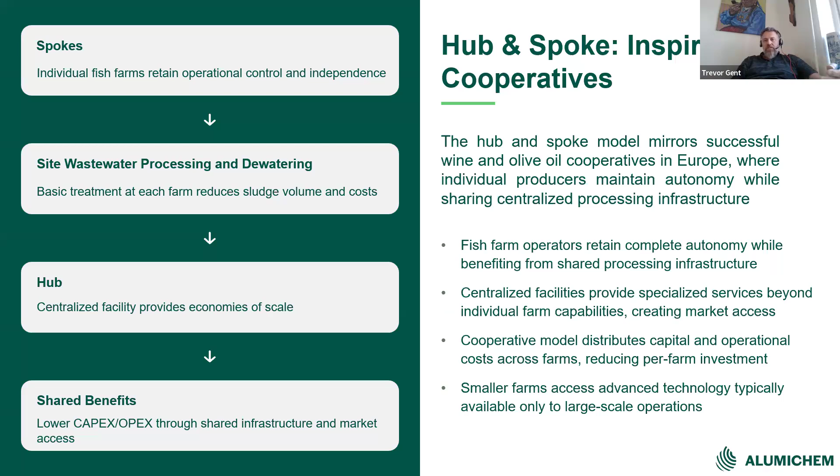So when we're really dealing with that comparison to the olive farmers, I think there's probably a lot of parallels in terrestrial agriculture.

I think there are similar models in play, to allow the smaller farmer to compete. Well, how do you compete against the big guys? You still have a good product, you still have a good process, it's just how do I get that access to the market?

I like the comparison because I get to go pick olives in the south of France, but woe is me, it's a good part of it. I feel so bad for myself.

When we're dealing with RAS wastewater, what I mean is in a RAS system you're going to collect some of the excess food and all of the feces in a drum filter or some kind of filtration system. We then backwash that, and that is your discharge. In that, you're typically high TSS, you have excess phosphorus, high nitrogen loads, and other contaminants you're going to look at are BOD and COD, and how do we manage the process.

Ultimately, anything in wastewater is about minimizing the contaminant stream, or in the case of fish farming, it's concentrating the nutrients into one place - that's the more positive way of looking at it.

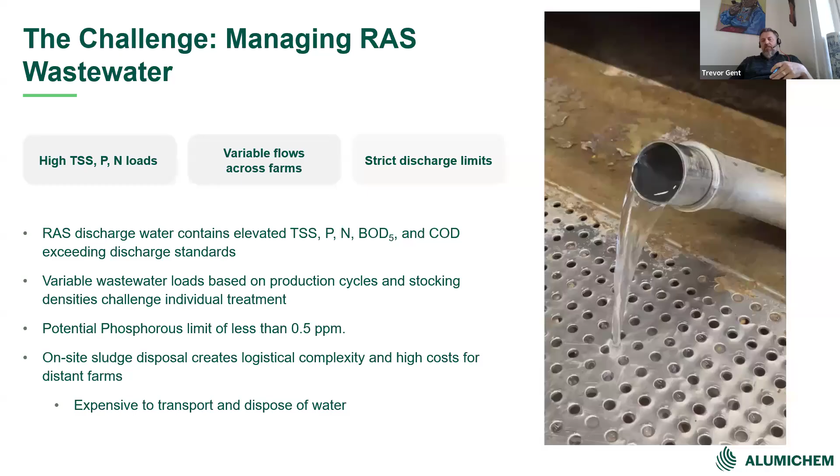In terms of the basic process at Alumichem, what we would do is take that discharge water - so you'd take the backwash from the drum filter. It's typically somewhere between 0 and 1% solids, probably closer to zero, we're typically dealing in ppm. Then we want to concentrate that up, so we'd do a chemical treatment process to remove the solids, remove some of the precipitates like the phosphorus, bring the BOD and COD down, and thicken it through mechanical separation.

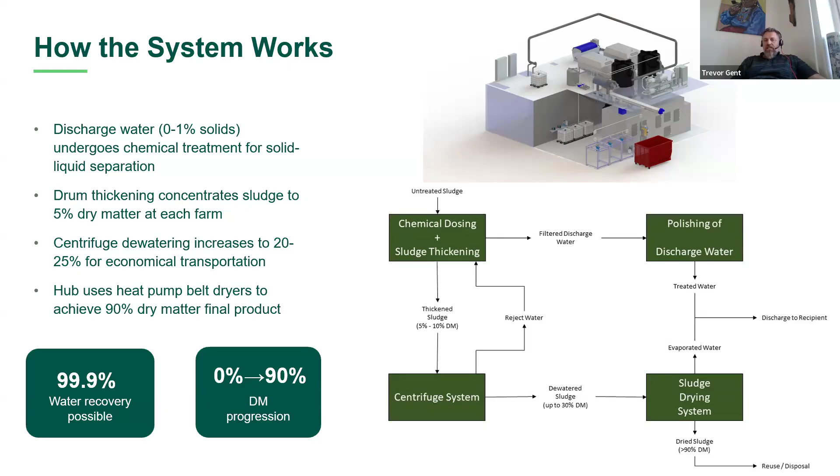Then we're going to dewater, and in this case what we're looking at is drying at the hub. But ultimately it's a process of reducing the discharge volume, while making sure we get the most water back into the system - that's really the key from my perspective.

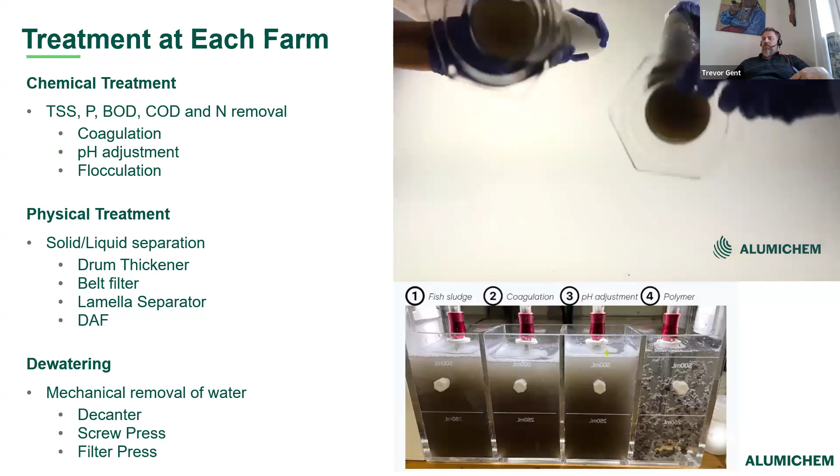From a chemical treatment perspective, and this is really where Alumichem brings the largest amount of value, is getting rid of the TSS, the phosphorus, BOD, COD, and a portion of the nitrogen. And what that means is you're adding a coagulant, you're pH adjusting, and you're flocculating.

So if you're watching the video that's playing there, basically the graduated cylinder on the left side is no treatment. So that's what the fish sludge looks like. If we don't treat it, this is what it will look like, and it will eventually settle, but do you have the time to let it do that? Usually we don't. So what we would do is chemically treat it so that we get the proper separation.

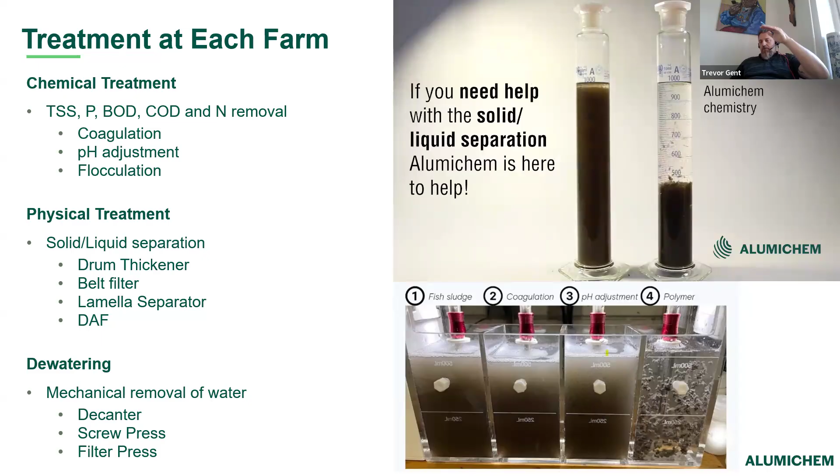We would also precipitate your phosphorus in that process. We'd remove a large portion of the COD and the BOD and more nitrogen than you would expect. But at the end of the day, to get rid of the nitrogen, it's usually dissolved and it lives in a RAS system as nitrate because you're going through the nitrification process typically in a RAS system. They convert the ammonia to nitrate, and then we have nitrate that flows through the system.

If we need to denitrify, again, that's plausible. We're not going to talk about it today because it's an extra step that needs to come in. When you're looking at the physical treatment, basically this is where we're going to try and separate that solid and liquid. If you look at the bottom, you get your fish sludge to that beautiful, nice clumpy solids on the bottom there. We can use a drum thickener, belt filter, lamella separator, dissolved air flotation. They're just different mechanical ways of separating solids and liquids, right?

Hey, did you speed up that video? It looked pretty quick. Yeah, it's very sped up. Thanks for pointing that out. I appreciate that. Because otherwise we'd be sitting here for another minute and a half. It's still fast, but it's not as fast as I may have portrayed it. Is this where I have to say some images might be larger than you'd expect in the mirror? But it all happens within a few minutes. It does happen relatively quickly.

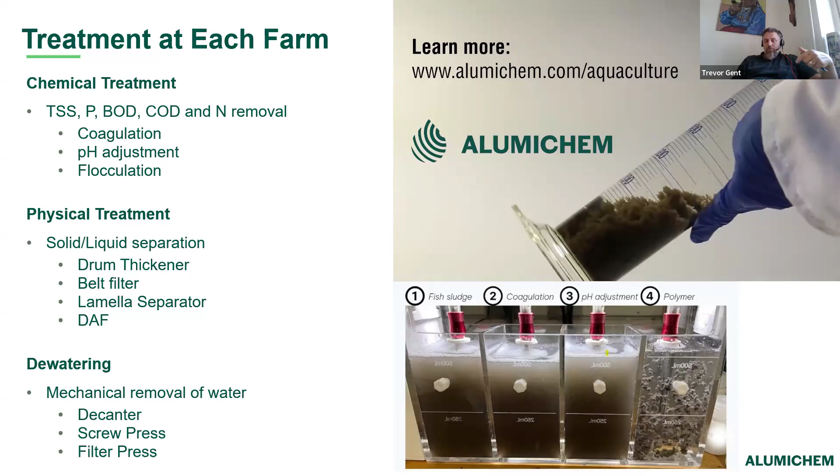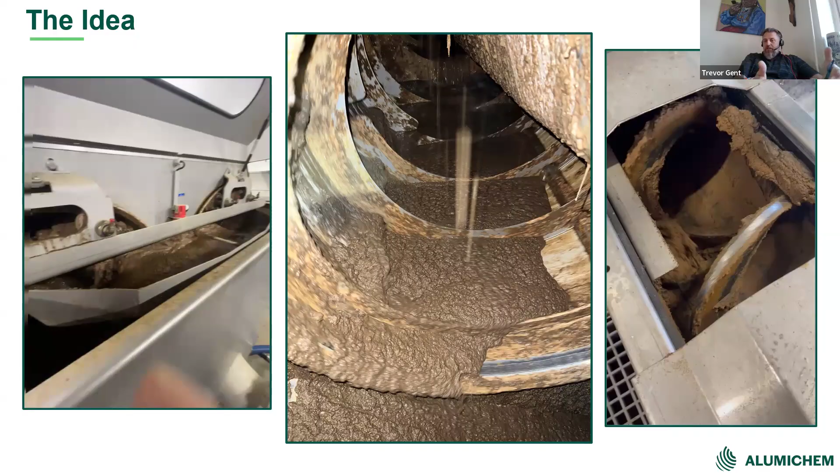And then dewatering, mechanical removal of water: decanter, screw press, or filter press. So if you look at this now visually, on the left of the screen, we have a drum thickener. Basically, we take that nicely flocculated water, we put it into the drum thickener. The picture in the middle is what it looks like in the drum thickener. This is going to be at about 5 to 8% dry matter. And this is fish poop and excess fish food in the photo.

At 5 to 8% dry matter, you've got to remember we're at 92 to 95% water. Do we want to transport at that level? Probably not. So we look at the dewatering step, which means in this case, this is fish sludge that's come out of a decanter. This is 25 to 26% dry matter. Basically, it's formable. It looks like a mud ball at that point.

Super transportable, super easy to move forward in terms of disposing to the next step. Now, if we wanted to look at drying, which we've talked about in this case, to put a dryer at each facility just doesn't make sense. The capital expenditure is too high. The dryers aren't small enough, so you're going to be way oversized. The footprint goes up. There's just a lot of factors that say this doesn't make sense for the small facility. But it does make sense when you get to the hub, right?

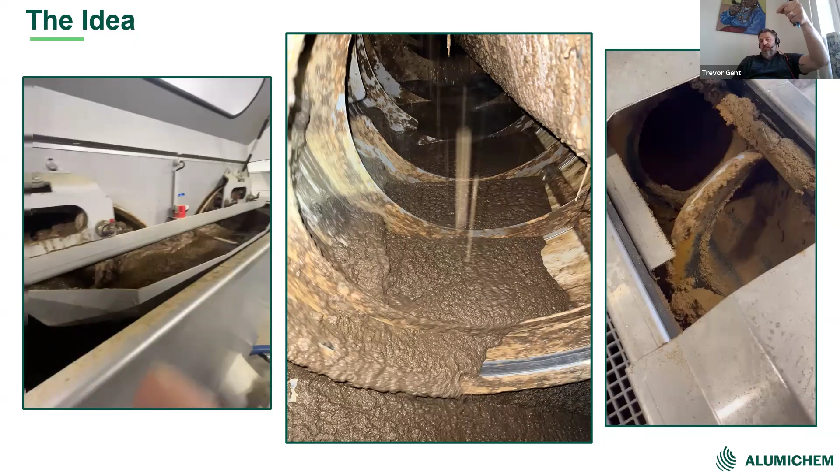So now we look at drying at the hub, and essentially each of those spokes is going to take their sludge to 20 to 25% dry matter. They're going to stick it in a big bag and ship it to the central facility. How long does that take, Trevor? Like the dewatering on your process on the previous slide there.

Yeah, when you're getting the solids out of a drum filter, how long does it take to go through these steps? Start to finish, it's about 15 minutes. Okay, so in the picture that looks like it's going to be pretty smelly business, but if it's that short, it's probably not that bad. It doesn't smell yet. Yeah, it's not that bad. Don't get me wrong, there's still odor.

It's not for the faint of heart, but it smells honestly just a little stronger than the fish farm itself in reality, right? As long as it doesn't go anaerobic, correct. Then it kind of smells more like soil. It smells like wet dirt. That's a great analogy. It kind of smells like wet dirt.

Let's remember it's still a concentrated waste facility or concentrated discharge facility, depending on how you want to look at it. It's a nutrient facility. Concentrated nutrient facility. Sure. I like that as well. But what we're going to try and do is collect it so that each farm only has that sitting on their property for a certain period of time, so the odors don't accumulate and we don't have that big issue.

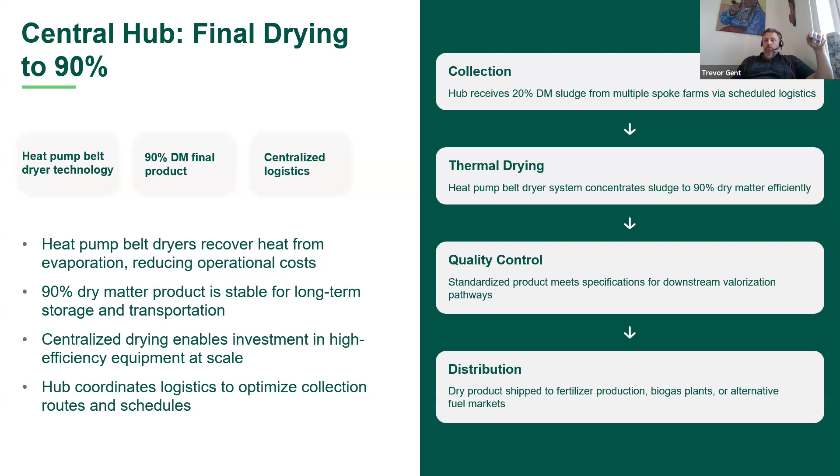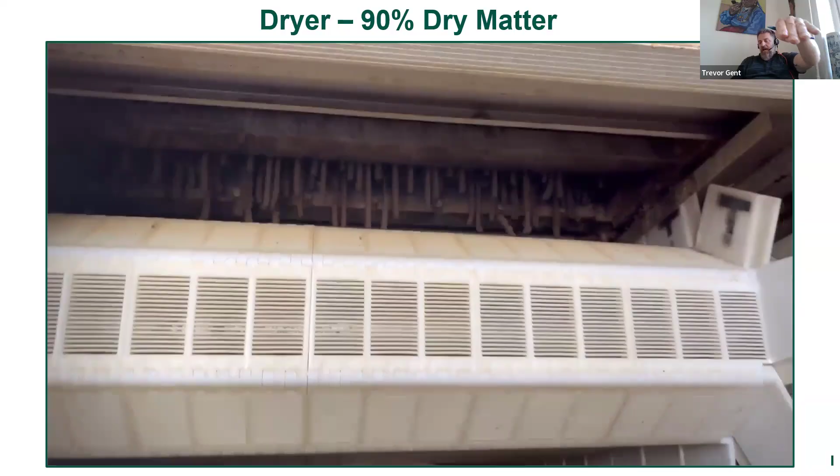70 degrees. In the dryer, it takes longer; it stays in there for an hour. That makes sure that it's hygienized. But the advantage is what comes out at the top here. That mud ball gets broken into almost like a spaghetti string. It drops onto the belt. Hot air flows up through that belt. The first belt goes to the back, the second belt comes to the front, and this is fish sludge as it comes out at 90% dry matter. So it's like a pellet.

So that pellet then gets collected in a big bag and can be stored for any length of time necessary. I really like that part of it, because if you are in Alberta, for example, or somewhere north where it's frozen all winter, at an earlier stage you can spread some of these on fields, but not when they're frozen. It's tough to spread onto ice or snow. So this you can store in big bags for a long period of time.

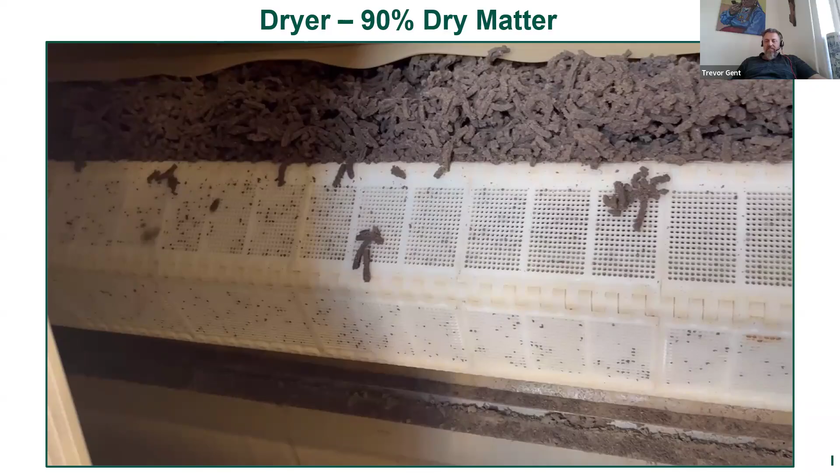Yeah, exactly, and then you can transport it, you can truck it. Very mobile, very storable, I really like that. So now what we want to look at is, okay, we've talked about what we're going to try and do.

Now I thought let's put this into actual attainable numbers of what this really looks like. So, as you mentioned, we've got 20 independent RAS farms, each producing 300 tons of head-on gutted coho salmon, correct? Coho? Yeah, starting with coho. Yeah, that's right.

So again, using basic principles of the process with an FCR, that's your number, of 1.2. It's about 1150 kilograms of feed, which translates to dry matter of 250 to 300 kilograms a day. So that in essence translates to at each spoke, you're going to have 2 to 5 cubic meters of water. That is super manageable in terms of a wastewater flow, in terms of equipment, in terms of flow rates, in terms of process. 2 to 5 cubic meters an hour is the sort of perfect world.

If you were then to look at this the other way, if this was a big farm, that would be 40 to 200 cubic meters an hour. That's a massive variable in terms of what that looks like, right? Like that's a completely different ball game. If you're at 40 cubes, yeah, it's manageable, but 200 cubes an hour, that's a big facility. You're taking up a huge amount of space.

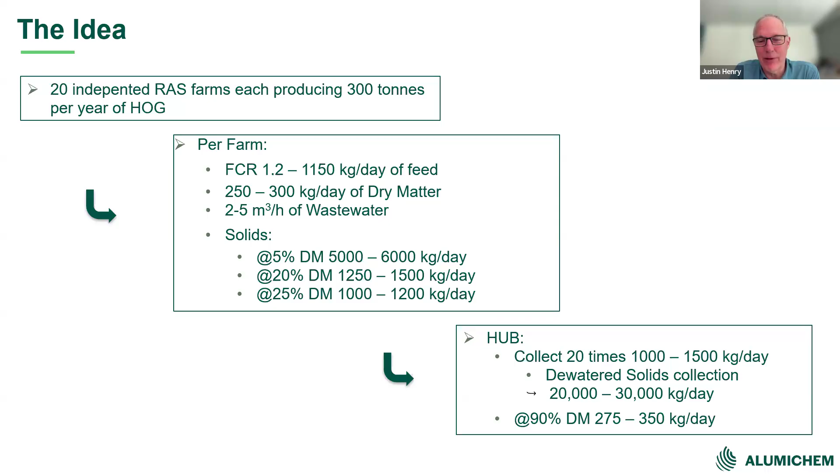Or it's gonna be overwhelming. And so the great part about farming in RAS is that you get to collect the nutrients, and then the negative part is that you collect the nutrients, and now you've got them. You go, holy, I got to do something. Now what? Yeah, exactly. It's a big challenge. If you're thinking you can just call the farmer and spread it on land and do this with it, absolutely you can.

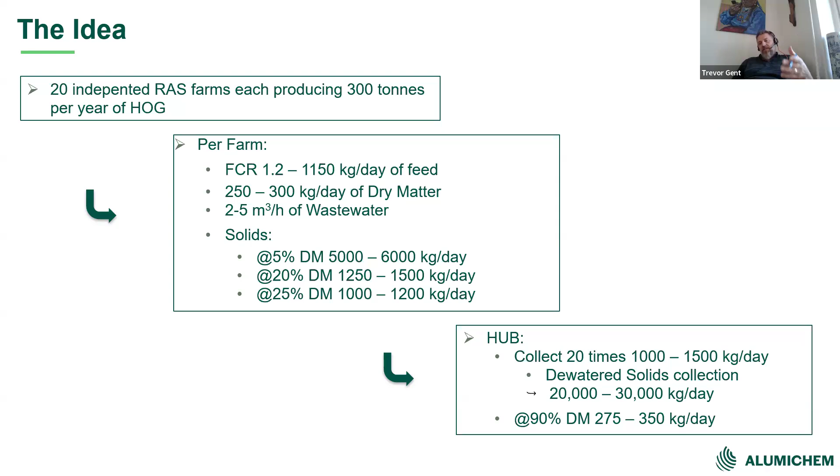But the problem with doing the farm spread is you're 100% reliant on the farmer and the farmer's need for that. They don't always need it, they don't always want it, and they don't necessarily want your waste stream. There's only a couple seasons that you even want it, even though it's a positive for them. They're not always looking for that because they're growing a different crop, or the crop is laying fallow, or there's something else going on. So yeah, you're absolutely right, that is the complicated barrier to entry.

But that's the concept, this is going to be the large centralized point, and that gives us a very different value recovery and end market with that perceived waste product, which can now be turned into a nutrient product. We can use it for fertilizer, we can use it as an alternative fuel in cement plants potentially, we can use it for biogas production, we can look at pyrolysis to create syngases. There's a lot more availability to us when we actually have a large amount versus looking at a small amount at a facility. What does one little farmer do with this tiny amount of waste product?

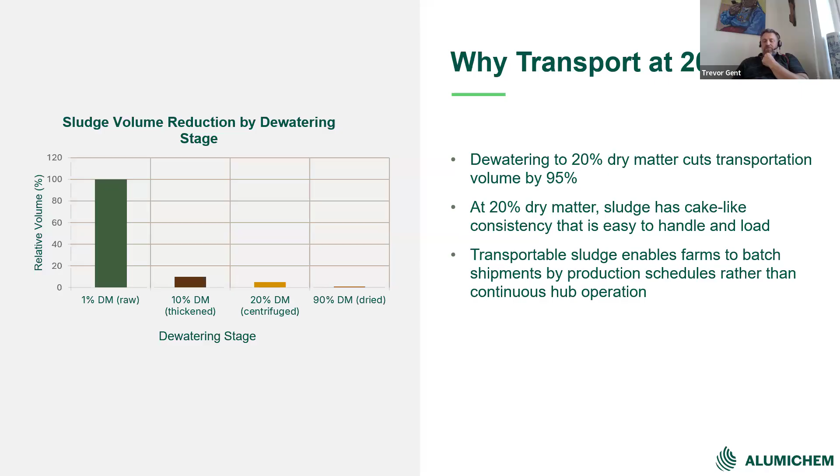And I think that's really what it means there. And again, just looking at the valorization pathways with that 90% dry matter, you do have the potential of fertilizer production, alternative fuels, pyrolysis, or incineration.

But to think about the economic model, and I think this is where I'll draw you in a bit more, Justin, is the efficiency of scale of utilizing big knowledge versus small knowledge, if that makes sense. Like you're going to have Alumichem provide a wastewater treatment design and plant for 20 places. So there's economies of scale in terms of acquisition, there's economies of scale in terms of engineering design, there's all kinds of wins there just on the wastewater treatment side. And then imagine that on the fish farming side, which is usually the larger component of CapEx and OpEx in the whole thing. Yeah, I think that's a huge value to the model here.

And when we talk about costs, like on the previous slide, you're talking about decreasing the transportation volume, which of course is decreasing the transportation cost. And I think that cost has been not just the transport, but all of the handling has been a challenge for the smaller—which isn't that small—these RAS facilities.

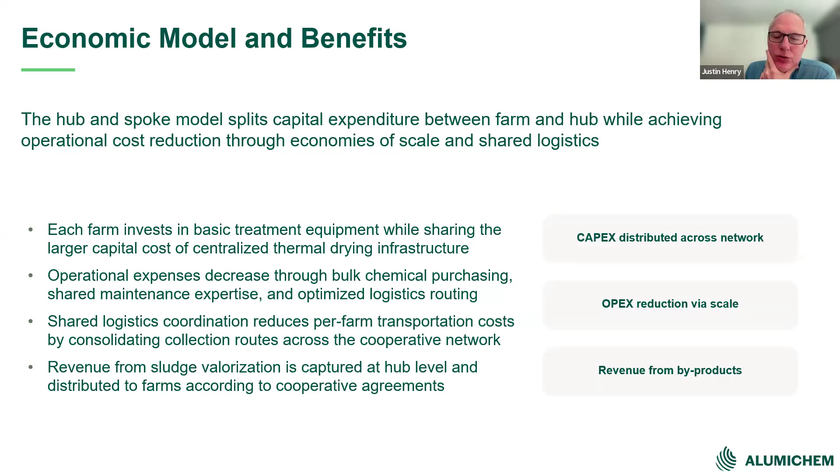Hey Trevor, can you jump back to your valorization slide there? You had that great graphic a couple of slides ago. Let's look at this one. There was a question about this area on the Q&A - how close are these spokes to the hub?

We talked about roughly 100 kilometers. It has to be close enough to service, close enough to make sense, since you're always going to be driving back and forth. I think there's a discussion point - some of them are going to be 20 kilometers away, some 100 kilometers away. It's never going to be a perfect circle, especially in Canada. I don't think you're going to get a perfect circle anywhere in the world, honestly - unless you go do this in Dubai and they just give you a circular piece of land and say go.

But I think it's going to translate - you've talked about the 100-kilometer mark, Justin. I think that's a reasonable point for managing CO2 footprint, managing transportation cost, managing that process. I think it's going to start with the hub saying, here's where we're going to be, or who are the farmers we want to play with. And maybe there's multiple sets of hubs - that again becomes a discussion point.

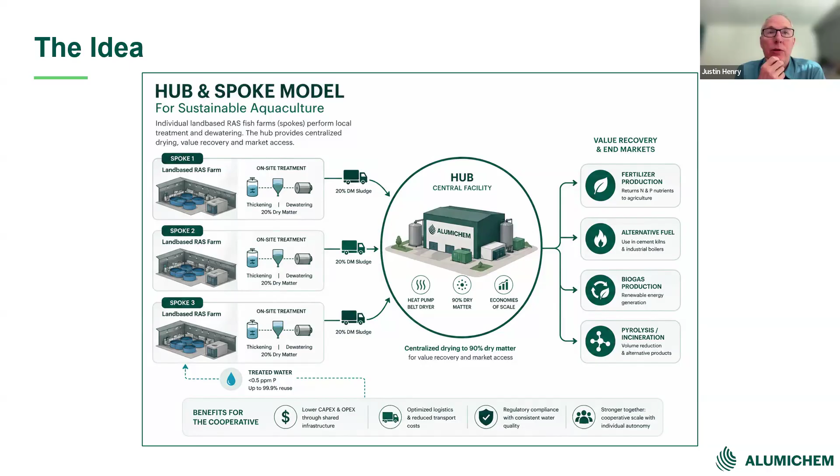So if you go to your valorization pathways slide, you've got pyrolysis. So pyrolysis - I don't really know that process too well, but you're heating at a lower temperature in a no-oxygen environment, so it doesn't burn. The basic concept of pyrolysis is you're burning without burning - you're creating a burning environment with a zero or very low oxygen environment. So essentially what you're doing is breaking down all your carbon chains into carbon, which becomes your biochar, and your off-gas hopefully becomes methane and carbon monoxide, which gets burnt as a syngas.

So the quick answer to the pyrolysis scenario is yes, lots of people have looked at it. In fact, we went as far as offering the opportunity for a DTU master's student to do a thesis on pyrolysis, and we supported that. It was actually kind of fun - total sidebar, but I got to sit in on his evaluation of his thesis, and I got to grade him.

Right on, it was a weird experience. Denmark does it completely different when you do your master's thesis, but either way - I did my master's thesis in Denmark. You had to do the presentation, and there's some stress there because it's huge - 100% of your mark comes down to this one hour, hour and a half presentation about your thesis, with three random people sitting there listening to you.

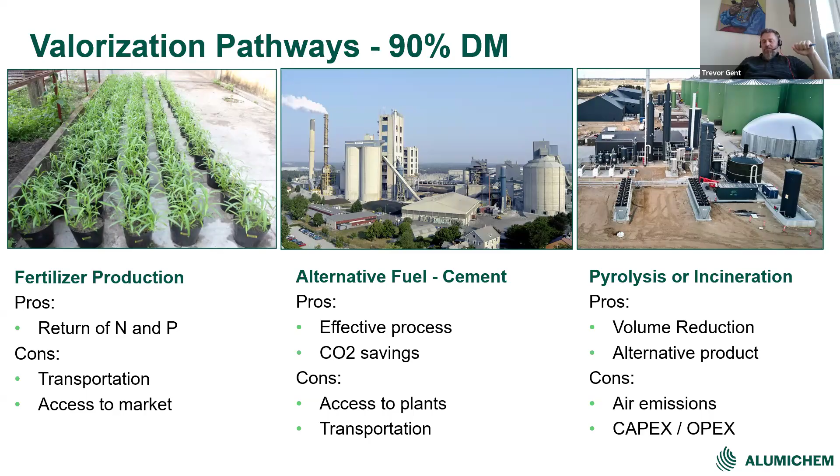Biochar, bioavailability of the products, which is definitely the preference there. Please feel free to throw more questions.

Basically, we just have this one slide, which is designed to look at the value pathway a little bit differently. You cluster your farms like we talked about in that 100-kilometer range. You get design and install of modular treatment systems, so you get efficiency that's there. Each spoke is pretty standardized.

From a RAS perspective, they're 300-ton modules. You get 300, 600, 900, right? Which is just 300, 300, 300. The waste treatment would just scale up exactly the same. So you get a lot of that efficiency in terms of how you deploy it.

You get efficiency in terms of purchasing, because you're going to buy 20 of the same thing, right? And then it makes it very, very simple. Then you get your centralized hub. But I think a lot of the big wins that become the side wins, but are ultimately long term, is this last one, which is knowledge sharing and integrated logistics, right?

So instead of one fish farmer operating, you now have 20 fish farmers doing things and tweaking things and playing with it. And, regardless of how good we all think we are as engineers in design, there's always something you can tweak.

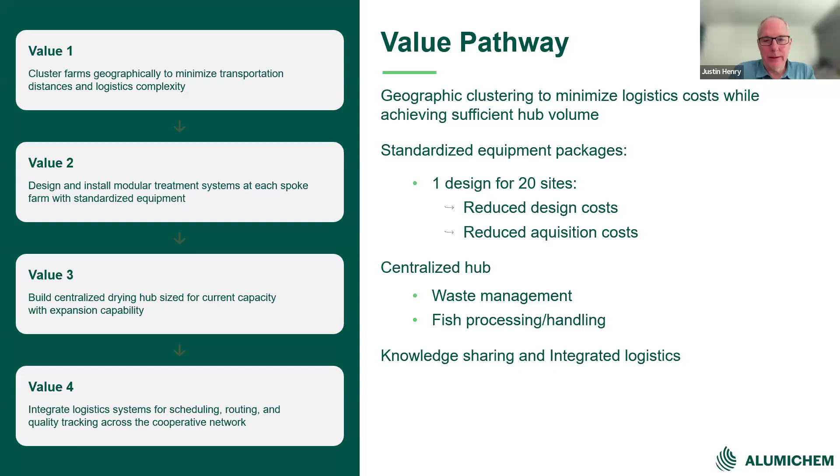So Trevor, what's the time frame? Like if you had a 300-ton farm and you wanted to get the equipment set up to get to that 20% dry matter point, how long does it take to get that equipment up and running from start to finish? You're probably about 6 months from 'hey, I'm ready.' If you called me today and we knew nothing about the process, it'd probably be about 6 months. If we have all of the initial centralized hub negotiating done, and it's really just an acquisition and deployment process, it'd probably come down to about 2 to 3 months.

Because then it's just acquisition, building, and delivering, right? And we can optimize that significantly. But if every plant is going to be bespoke and independent, oh we have to do a P&ID and PFD, and where is it going to be on your property, and what is it going to look like, then it gets complicated. But if everybody has the same box, here you go, 3 months.

Super simple, super deployable. But I can draw it out as long as you want if you want to go full bespoke. Oh, I want this over here in the corner, and I want 6 VFDs instead of four, and 7 monitoring stations and all kinds of weird things.